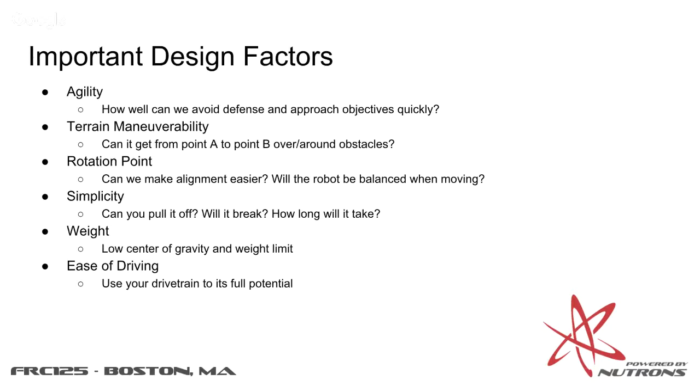Those are just regular traction wheels. They are relatively simple in concept. I'm sure you understand what they're all about.

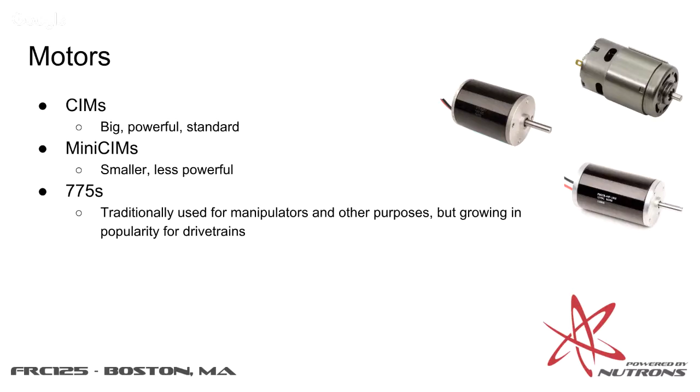If you have two motors on each side of your drivetrain, using this CIM motor as an example, that gives you 337 watts times however many motors you have on that side. You run them at that RPM, then use gears to get that RPM down to what you want your wheels to run at.

The basic idea, which I won't go deep into here, is that if you have a gear twice as big as the one it's meshing with, you're halving the speed but multiplying the torque, the rotational force it delivers, by 2. So you use multiple stages of gears to cut the speed down to the amount you want. If anyone has specific questions, I can go deeper into that at the end.

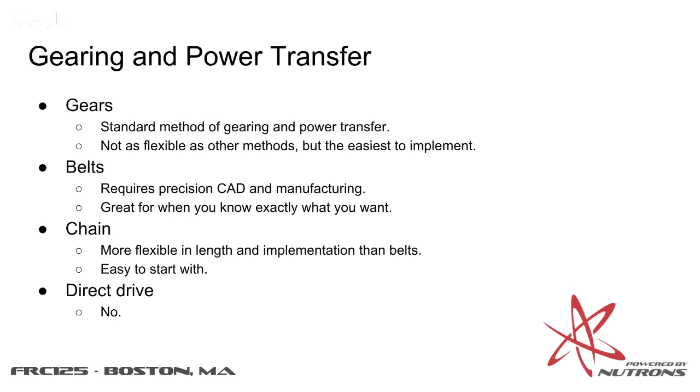Most of the rest of my presentation will be based on types of drivetrains. I've been talking about components, but this should hopefully contextualize it all in terms of how it comes together to influence the drivetrain type you design. These are archetypes, you could say, of what most teams do in FRC — not everything possible, but everything you'd likely consider during an average season.

From a macro perspective, there's tank drive, holonomic drive, and what I'm categorizing as exotic drives. Tank drives are the most straightforward, classic design — the type you get in the kit of parts, and the most likely to be robust and work. Holonomic drivetrains are similar to tank drives but let you move in directions beyond just forward, backward, and spin — you can also move side to side. Exotic drives are anything that isn't tank or holonomic, typically a combination of the two or any funky designs people have come up with.

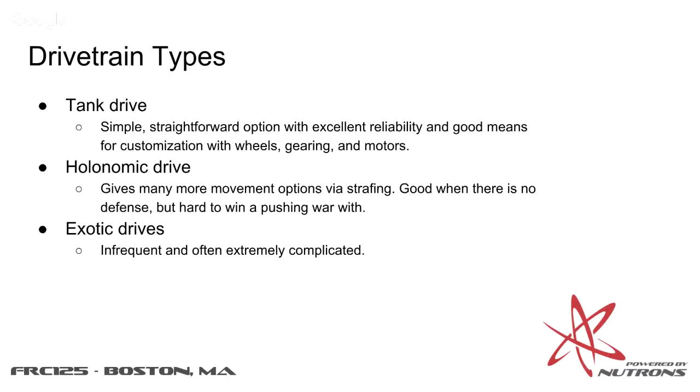Tank drive, the idea behind it is that similarly to a tank, but without the treads, you have two sides of your drivetrain, with 3 or 4 wheels or however many on each side. The two sides are powered independently of each other, but all the wheels on each side are powered together. So you have 2 or 3 motors power each side of the drivetrain. If you power both sides forwards, your robot will go forwards.

If you put them both in the backwards direction, your robot will drive backwards. But if you drive either side in opposite directions, it's going to spin your robot in place. Any degree in between that, you can turn. And that's the general idea behind a tank drivetrain.

The customization you can do within this typically involves traction wheels, but you can use 4, 6, or 8 wheels. You can do what's called a center drop, or put omni wheels in the corner, and swap out any of these traction wheels with any of the wheels I talked about earlier. Now, that doesn't mean anything if I don't go into exactly what these change.

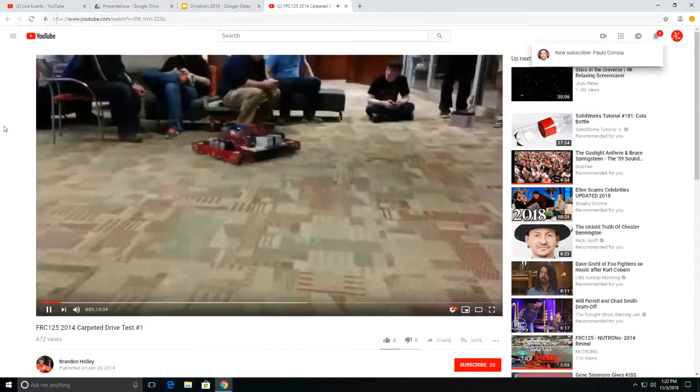I have a link to a video here just to show the mechanics of a tank drivetrain. This is our 2014 drivetrain. You can see how it moves. It's pretty zippy because there's no manipulators on it. This slows down a lot once the rest of the robot's on it.

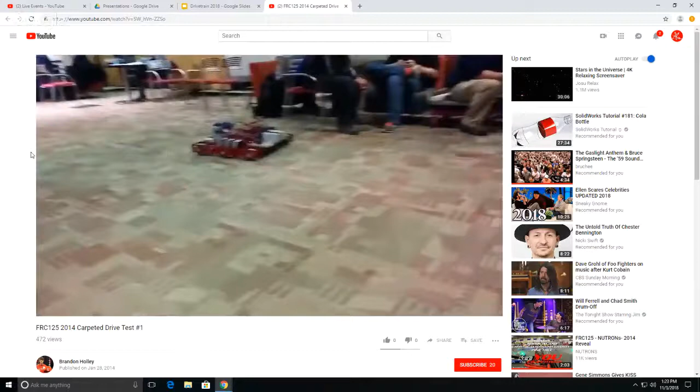Yeah, but that's tank drivetrains. Those are your standard in FRC. And these are a very abstract but formulaic concept. You can take a lot of formulas to them to develop what you want, right?

I need my rotation point here. I can either do a center drop or I can put omnis there. I need this much power, I add these motors. I need to get over obstacles, I use pneumatic wheels. You can apply each of these formulaic things, but there's definitely some area for creativity in design.

I mentioned I can talk about that at the end if you'd like. Oh, shifting is a great thing. Last year I talked about that, I'll add that in at the end and talk about it for a bit. The general scope of what I have up here is talking about the types of drivetrains, but I'm more than happy to answer any questions about transmissions, because shifting drivetrains are an interesting subject that I like to talk about.

So the next option is, if you're not satisfied with being able to drive forward, backward, and spin, and you want to be able to move to the side while moving down the field, a holonomic drivetrain would be the way to go. These are typically your more flashy drivetrains, but are much more complex in terms of their design.

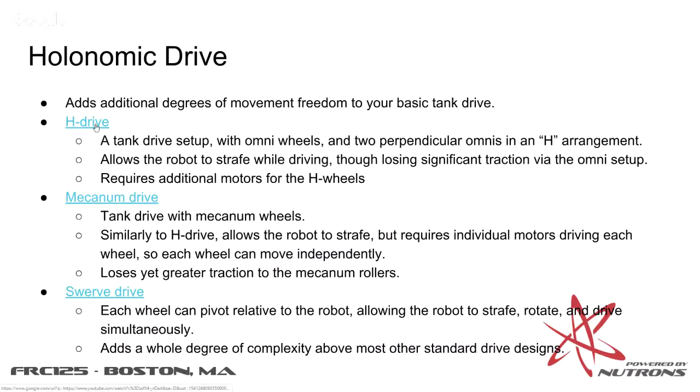The first one I have here is H-Drive. It's called that because you basically have 5, or sometimes 6, omni wheels set up in an H configuration, as you'll see in the video. The idea is that your corner wheels are all omnis, and then you have perpendicular wheels in the center of your robot, either 1 or 2, that push your robot to the side, allowing you to strafe, as you can see in this video here.

Yeah, so that's strafing there.

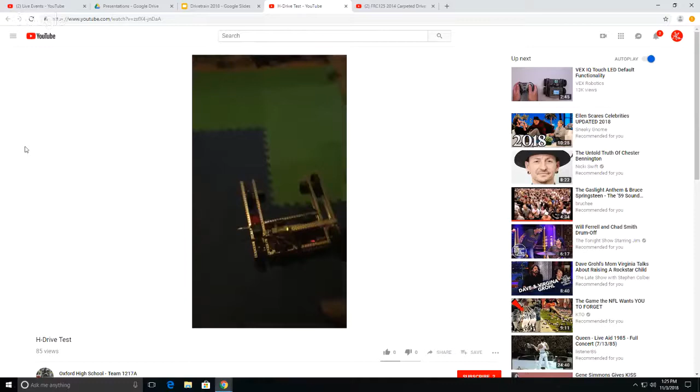Then you have a simpler construction method called mecanum drive, which uses mecanum wheels with rollers at 45-degree angles on the outside. This is a 4-wheel drive robot. You don't need the wheels in the center, but you're going to lose a lot of traction with both of these methods because they have passive rollers on the outside.

So realistically, if you're trying to drive into another robot and they're pushing back on you, your wheels can be spinning, but the rollers can be spinning just as fast in the other direction, and you can just get pushed. Mecanum drive isn't quite as smooth as H-Drive, it's a little more jittery, because each of the rollers are slapping the floor in subtle ways. You typically get more drifting if you're trying to strafe, or if you're trying to drive forward you might start to drift to the side with this method.

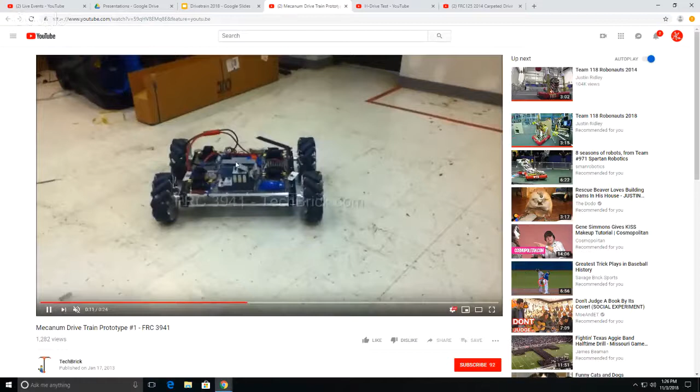But the beginning of the video is the best example for this. You drive 2 wheels towards each other and 2 wheels away from each other on either side of the robot, and it'll direct you one way. Flip it, and it directs you the other way. This is, like I mentioned, an easier system to pull off than H-Drive, but not nearly as smooth.

And then my favorite, which I technically should not advise any of you to attempt right away at all, is called swerve drive, where each of the wheels is a live unit itself - as opposed to just spinning, it's also pivoting on the vertical axis. If you program it correctly, it means you can control the rotation of your robot and the translation of your robot across the ground completely independently of each other and simultaneously with each other.

This is a good video by Team 1717, which no longer exists, but they had one of the best swerve drives while they were in FRC.

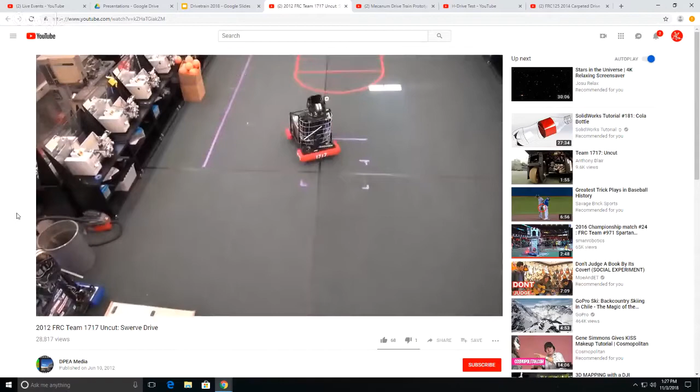They basically decided, this was a capstone program at their tech school, and then they replaced it with another capstone program. They were like the only FRC team that's ever outgrown FRC, that's ever truly felt like, oh no, we need something more than FRC.

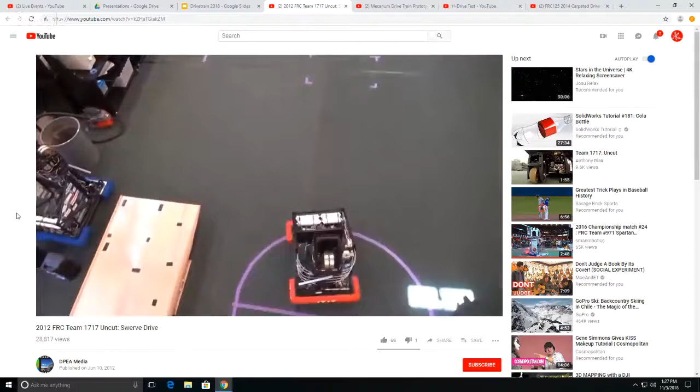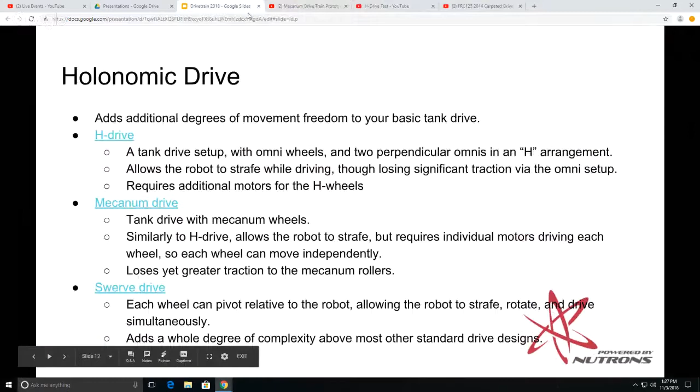But yeah, it's pretty cool what they can do with it. It's extremely complex. I think I have a picture of it on the next slide, but that's swerve drive, which is one of my favorites.

Yeah, so you saw mecanum drive. H-Drive is a better example here of being able to actually see it. You have the one wheel in the center that allows you to strafe. You might also see two wheels in the center on a rocker, where each wheel is powered by the gearbox in the center, but depending on which direction you're driving it, it'll slam that rocker into the ground. A big problem with H-Drive is that you might not get the right contact on each of the wheels that you want. So that rocker in the middle - you're driving to the right side and it'll slam to the right, pushing that wheel into the ground with the force you're driving with.

That helps you get traction. And then swerve drive, as you can see here, is extremely complicated, where each of these wheels has its own gear reduction in the modules, and each of those modules rotates around the vertical axis. One motor to drive the wheel, one motor to pivot it, for each of the four wheels on that robot. I love swerve drive, though.

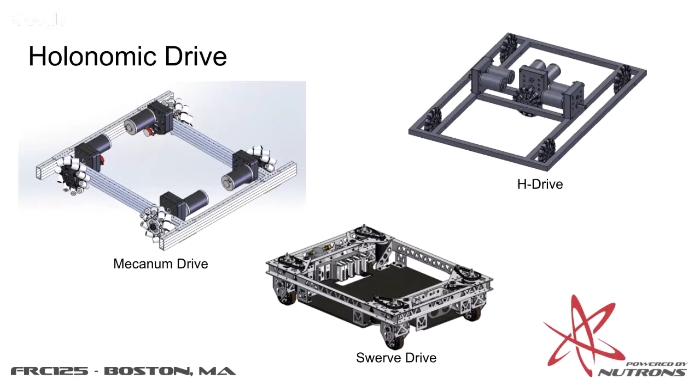And then the last category of drivetrains here are exotic drives. This is what you'd define as the arms race of drivetrains, hence the title of the presentation. You'll see a lot of times, if you're looking at Chief Delphi or any other online forums, or if you're looking at Discord - for those of you who are in the FRC Discord channel - there are people who are going to get bored and design drivetrains, or teams that are using it as an off-season project.

Typically these will consist of actuated parts, wheels that move up or down, or using an absurd number of wheels or an absurd number of motors on the drivetrain. I covered the general cases - 4 wheels, 6 wheels, or 8 wheels - but some teams will be like, we're going to design a 15-wheel drivetrain. Those would fit the category of exotic drivetrains in this situation.

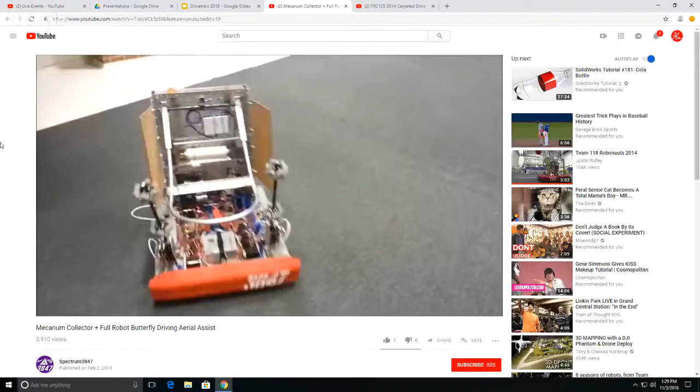A few examples of these are any sort of insect or critter drive, like this drivetrain by Team Spectrum, where you have 2 drivetrains simultaneously, and you drop one down depending on which one you want to use.

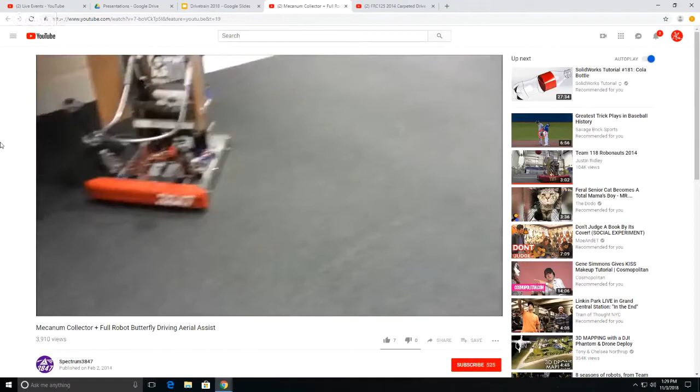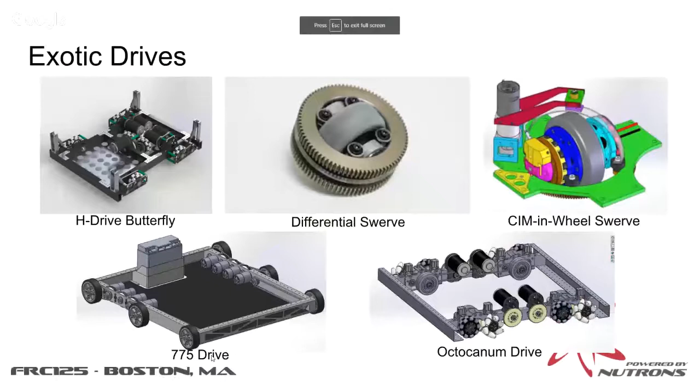This one is Butterfly Drive, which should be on the next slide. Yeah, this is in the top left here, where you have traction wheels and omni wheels on each corner of your robot.

If you drop down the traction wheels, you might have a 4-wheel traction drive that has a lot of scrub. I wouldn't advise doing 4-wheel traction drive, but they can drop the traction wheels in the back of the robot while keeping the omni wheels in front, giving a 2+2 with the rotation point around the back of the robot.

Or they can drop the front traction wheels and have the omni wheels in the back, rotating around that point. Or they have the H drive system, the 2-wheel rocker system I was talking about. If they pull the traction wheels up all together, boom, they have an H drive. They have three drivetrains, 2 of which happen to be the same thing in reverse of each other simultaneously. It allows them to do some pretty cool stuff.

Another one I wanted to mention is Kiwi Drive, which is basically putting 3 omni wheels on the corners of a triangle on your robot at different angles and running them to allow holonomic motion.

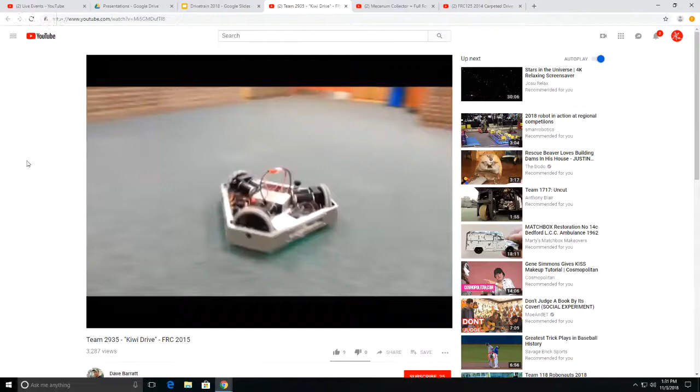I typically don't advise using this one though, because it's really easy to push around and makes your robot a triangle. One team that really pulled it off was Team 1114 Simbotics in 2015, where they designed an almost triangle robot, but used the gap in their robot to suck in the game pieces, which were large totes. It's one of the best designed robots of all time, and it used Kiwi Drive. So I can't really diss Kiwi Drive if one of my favorite robots of all time has it.

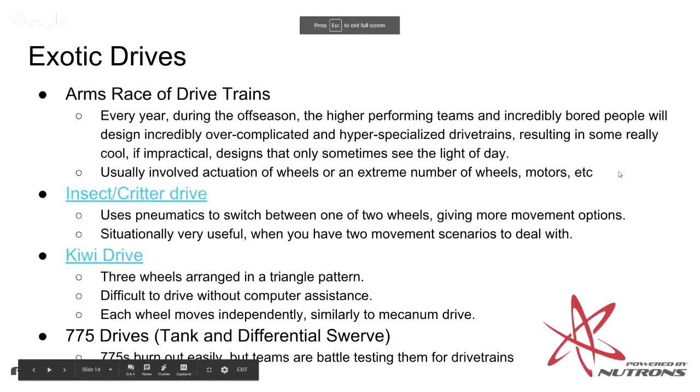Then there are different things, like replacing the CIM motors with 775 motors. Some teams will use 4 775 motors as opposed to 2 or 3 CIM motors, which gives you a huge power output into the drivetrain, but they're typically more likely to burn out. When you're driving them into a wall, they'll probably start to burn. But a lot of teams are starting to test them.

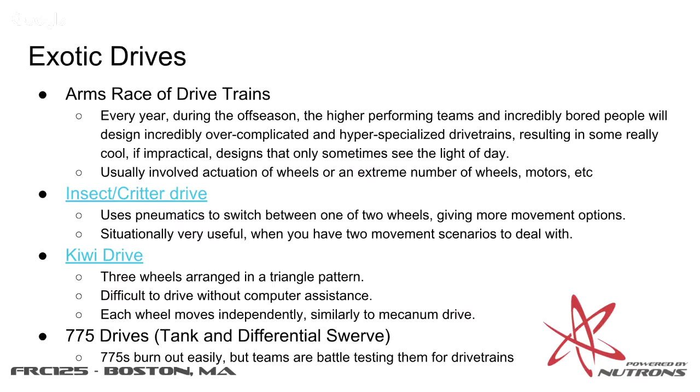I mentioned the H drive. Here's 4 775s hooked up to a drivetrain, low profile, small motors, high power output. You have Octocanum, which is a similar concept to H drive, but instead of swapping out a 2+2 for an H drive, you're swapping out a 4-wheel traction drive for a mecanum drive.

I'm actually working with a group here at Northeastern to design one of these, which is super cool.

The big emphasis of this presentation is, as much as I talk and geek out about all of the cool drivetrains, you really need to build to your capabilities. Your drivetrain needs to work, and cooler isn't always the best.

A great example of this is two different approaches: Team 254, the Cheesy Poofs, and Team 148, the Robo Wranglers. Team 254 consistently builds a tank drivetrain every single year, and it looks very similar every year, and it works every year. They design their robot around it, and they design most of the time some of the best robots in the world around it. In their mind, if you're spending any time on your drivetrain that you could have been spending on something else, it's just not smart.

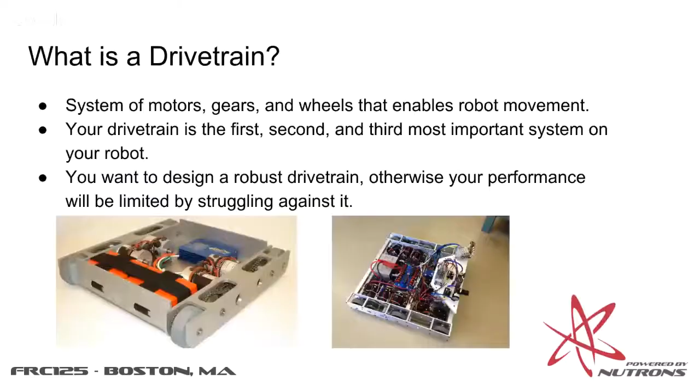In the off season, I think drivetrains are one of the best things to try designing. You probably won't want to start with designing an adventurous drivetrain during build season, but it's one of the best learning opportunities to try one of the exotic drivetrains in the off season. The worst thing that happens is you don't end up using it, but you learned how to design it and got experience - it's a really cool experience to try out that kind of stuff.

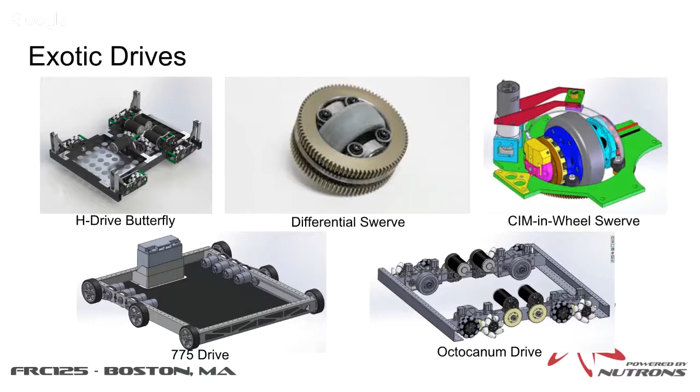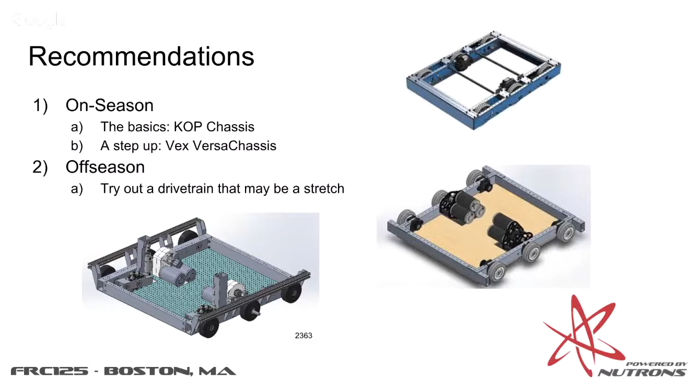This was an off-season drivetrain by Team 2363, Triple Helix, shown in the bottom left here. They prototyped these drop-down Omni wheels that allow them to make a simulated two plus two to get out of pins. It's just a cool project that they put together - I don't think they used it in season, but their students learned a lot from it.

Discord - there's an FRC Discord channel, and also a New England FIRST Discord channel for those of you who use Discord. It's a great way to conversationally interact with people in FIRST.

And then, of course, the Compass Alliance, as I hope all of you have heard about today, is 125's collaborative platform - or it's not just our platform, but we're part of working on this platform with a bunch of other teams in FRC. It basically concentrates all the resources online from other teams into one place, as well as creating pathways, like a running-a-team pathway.

It's going to take you A to Z on running a team, or a strategic design pathway is going to take you A to Z through that whole process and link you to articles, that way to concentrate your efforts. And that's always a fantastic resource to check out.

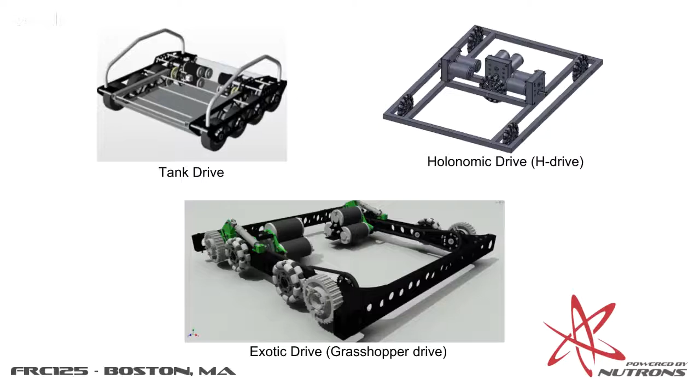So the idea behind that, go back to the motor curve slide. Okay, the idea is you select a motor based on the output power. For a certain load, for the certain weight of your robot, the acceleration that you want to achieve, and the top speed that you want your robot to go at, you're going to need a certain output power in order to achieve that.

So you add the specific amount of motors that achieve that output power, and then you use this peak power on the curve here, and that's going to give you, for a CIM motor, 2,670 RPMs that you want to be running the output of the CIM motor at. But you don't want your wheel running at that. So you use gears in order to reduce the speed of your motor to the speed you want your wheel at.

Who here is familiar with gears in general? I'm sure you've all heard of what gears are.

The idea is, as I briefly mentioned before, the ratio of the diameter of the gears is going to reduce the speed of your axle, of the next axle, proportionately. So if you have a gear that's 3 times the size of the gear that it's spinning... no, I said that wrong. If you have a gear that's 1/3 of the size, that's an important correction. If a gear that's 1/3 of the size of the gear that it's spinning, then the gear that it's spinning is going to be running at 1/3 of the speed rotationally.

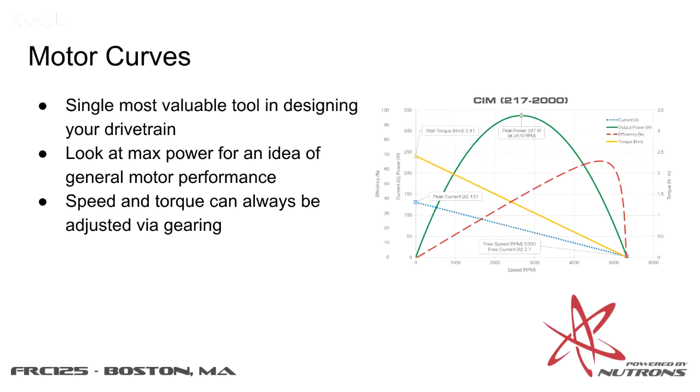Are there any other questions? Yeah, Patrick. Oh, you want to go into flipped gearboxes?

Flipped gearboxes are only applicable if you're really designing your own gearbox, though a company called West Coast Products, in association with VEX, has started to sell these. The idea is that when you have your motors going into a gearbox, you have your motors here, your gearbox in front of those, and then in front of those, your wheel. There's 3 stages. If you take those motors and put them on top of the wheel, with the motors going into the gearbox and the gearbox output shaft going in the other direction, you can have the motors over the wheel. It takes up less space horizontally in your robot, it's much more compact, and you're putting more weight concentrated above your wheel, which gives you more traction.

That's more something you'll see when designing a custom gearbox, which is one of the last things you're looking to do custom on your robot, because you can get some great off-the-shelf gearboxes from AndyMark and VEX Pro, and I think they now offer a commercial off-the-shelf one as well.

Are there any other questions about the types of drivetrains, ways you might change out components to design an effective drivetrain, or the number of motors? I kind of whipped over a lot of the tank drive stuff, but there's a lot of configuration stuff there.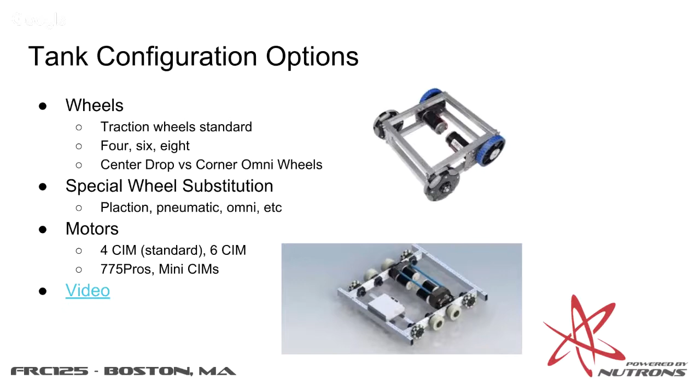Regulation around what? You can use theoretically any size wheel that fits within the total frame of the robot, though I wouldn't recommend using a giant wheel.

Your range of wheels, that's a good question, is typically going to be - you probably won't find any wheels under 3 1/4 inches unless you're us at the end of the season, once they've really worn out, then they'll be a lot smaller. 4-inch wheels is typically the standard, and then for games where you need more clearance, you're going to find 6-inch and 8-inch wheels more commonly. You won't really find anything larger than 8-inch wheels.